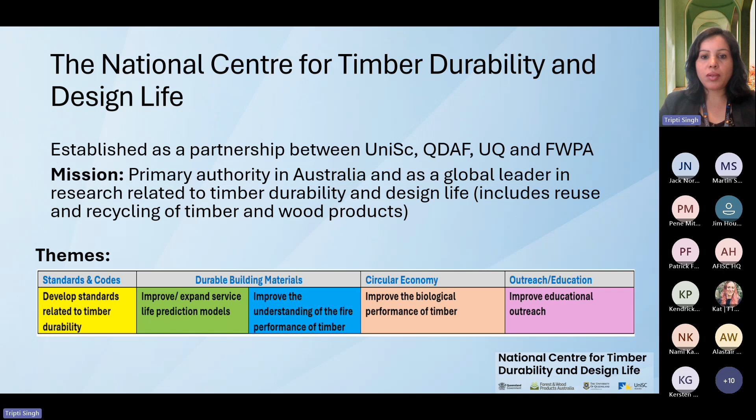Sorry, for some reason it's not going. Next. Right.

Under the circular economy project, we are encouraging the design of buildings and products for long life, maintenance, and reuse via circular economy, promoting the use of recycled timber and wood products. In a linear economy, what we're used to is take, use, and dispose. In a circular economy, which is in contrast, the aim is to eliminate waste and keep resources in use as long as possible. At the end of life, the product makes the beginning of a new cycle. So in the circular economy, we try to make, use, reuse, remake, and recycle.

The Australian government has set several targets and initiatives to move towards a more circular economy by 2030. A report commissioned by PwC for the government has recognized that a circular economy model for Australia could generate over 1.8 billion in direct economic cost savings over 20 years. And it's not only the economic benefit, it has huge environmental benefit too, because the circular economy model could save 165 million tons of CO2 per year by 2040.

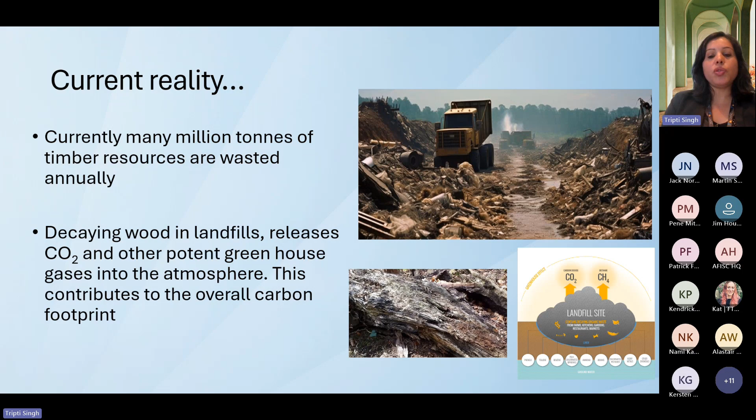However, the current reality is that many million tons of timber resources are being wasted annually in landfills. The issue is not only economic loss, but also environmental loss, because decaying wood in landfill releases carbon dioxide and other potent greenhouse gases into the atmosphere. This contributes to our overall carbon footprint.

The irony is that timber is an ultimate renewable resource, so we need to cascade it through multiple life cycles. One can argue that a piece of wood can have up to seven lives, but currently about 60% of timber resources go to landfill. The rest is predominantly burned for energy.

This is the right time, and there are various constraints and drivers for timber circularity. Looking briefly at the constraints, Australia is a vast country, so our resources are widely dispersed. It's perceived as...

Someone is saying the slide is not moving. No, it was moving for us. I think, Alistair, you might have to click live down the bottom to make sure you sync with the presenter, but I can see it and a few others have said so, you can keep going, Tripti.

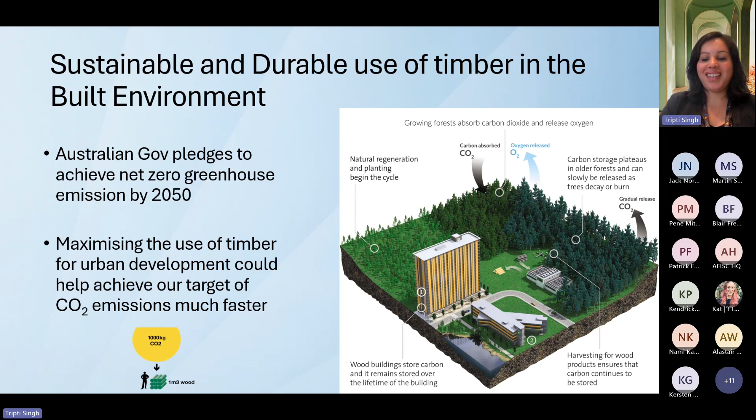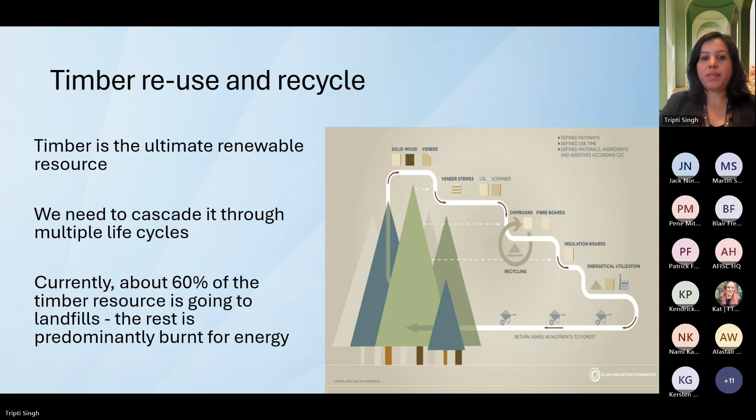Okay, that's great. Thanks, Kersten. So we were looking at the constraints and the drivers. Australia is a vast country, our resources are diverse and dispersed, timber is perceived as a low value material, often our timber has chemicals, resin, and fasteners so it's difficult to separate, and across Australia we have inconsistent regulations.

But there are big drivers. Some people are already using engineered wood products where they are recycling timber, so roundwood has been re-sawn and reused for different applications. Due to limited landfill capacity, we are seeing increasing landfill costs and increasing waste disposal levies. There are many product stewardship initiatives underway in Australia. The National Waste Policy and associated product stewardship initiatives are designed to push the country toward the circular economy mandate. So there are many drivers, and this is the right time for timber circularity.

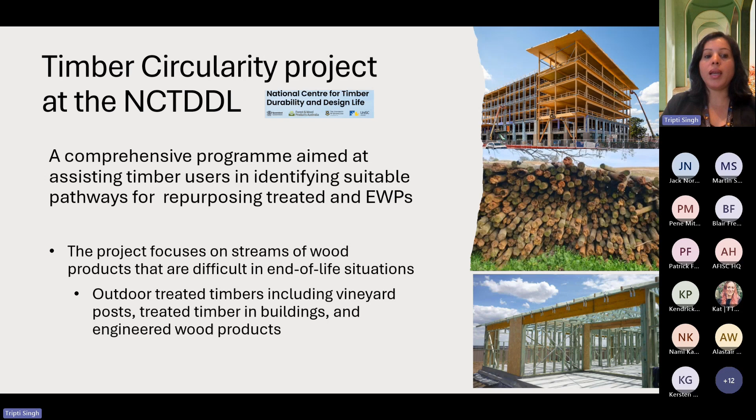That's why at the National Center for Timber Durability and Design Life, we have a comprehensive program aimed at assisting timber users in identifying suitable pathways for repurposing treated and engineered wood products. The project focuses on a stream of wood products that are difficult at the end-of-life situation, such as outdoor treated timber, including vineyard posts, treated timber in buildings, and engineered wood products.

We have collaborators and we acknowledge their support, including financial support, across the supply chain - industry associations such as Forest and Wood Products Australia, AFPA, some treatment and glue companies, manufacturers like FTMA, very supportive FWPA, and users like Wine Australia, who we're working very closely with.

The project has 7 tasks. It's a 3-year program, and we only have about 1.5 years left. What we're trying to do is assess the amount of the waste stream, where it's located, the condition of the resources, and what chemical or resin it contains.

The third task is looking at the regulatory hurdle, which is a major issue with resource circularity. We are investigating options and exemptions that may be required for reuse and recycling of treated timber.

Logistics is significant for all material in the circular economy, particularly in Australia due to the vast distances. So modeling logistics and understanding the costs involved will help determine appropriate solutions in various regions. We're looking at geospatial mapping of all the resources, along with councils with circular economy activities already underway.

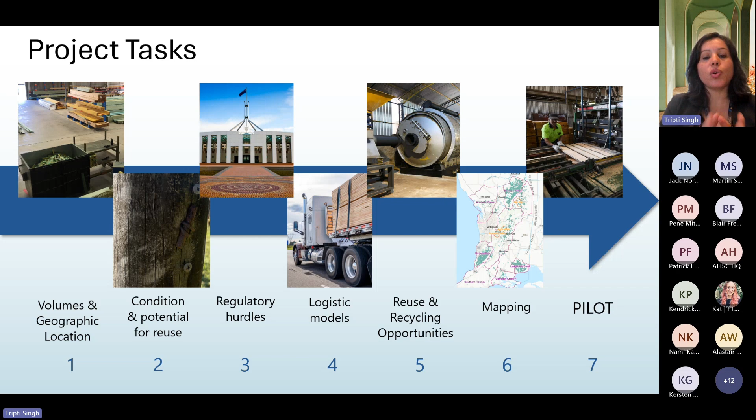At the end of the project, we want to demonstrate some pilots. For example, we're working very closely with Wine Australia on sorting, collecting, and repurposing vineyard posts. So I think that's all I have to say - happy to answer any questions at the end.

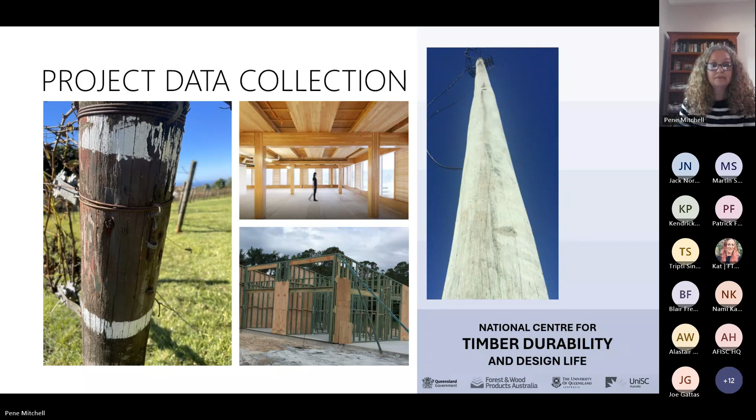But in order to find solutions, we first need to understand the resources that are currently being wasted - so how much resource there is, volumes and weights, where that resource is located, what type of resource it is, and its condition and potential for reuse.

For example, with the vineyard posts, we analysed the amount of preservative treatment retained after 20 plus years of service life. We're also doing strength testing so we can compare the treatment levels and strength to new posts, to determine whether they can be reused in situations where new posts would perhaps be used, such as fence posts in agricultural areas.

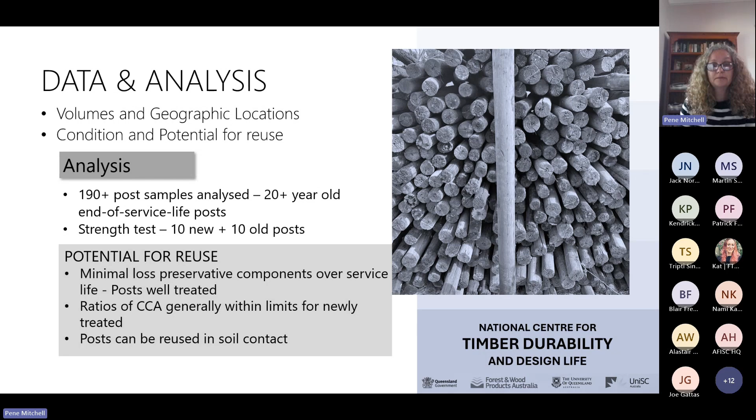Generally in data collection, we've been having discussions with industry and industry associations, undertaking site visits and conducting surveys. We've visited quite a few locations in New South Wales, Queensland, South Australia, Victoria and Western Australia, and Tripti's going to Tasmania soon as well, so we're getting a fair idea of what's actually happening nationally.

In terms of the frame and truss industry, we initially started discussions with Kirsten and Kat at FTMA, who we've had ongoing communications with, and they've been giving us a lot of support for this project. We've engaged with industry and undertaken site visits to understand where the resource that's currently wasted was produced in the fabrication process, how much unused resource is actually being produced, and in what form and condition it's in.

Whether it's clean offcuts or wood shavings and sawdust, for example. In the case of offcuts, what sort of sizes are they that can't actually be used any longer in the process or for other uses on site? We're looking at how the resource is currently collected, so what sort of skip bins are used, for example, where the resource is currently ending up, and also costs involved with this.

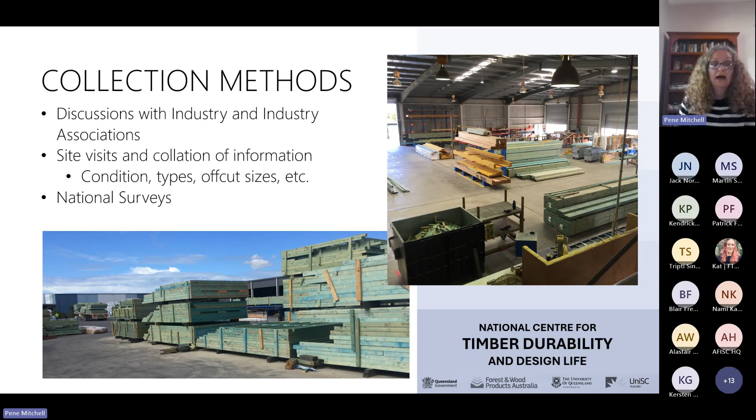So this information that we collated on site gave us a fair idea of how to compose a survey which would allow us to collate the information that we wanted. So we just set up a Microsoft Forms survey that we kept online from February to May this year. We targeted frame and truss manufacturers really through FTMA correspondence. So they put articles in their newsletters and online. They emailed people about it. They also mentioned the survey at their national conference held in March this year. So they were getting the information out widely for us.

So some of the results: we actually got 39 companies who responded to the survey. That was about 16% of the total number of companies. Some of those companies indicated that they did have multiple sites because, as Kirsten mentioned, there's 287 unique facilities, whereas only 249 companies in total. The majority of respondents were in Victoria, New South Wales and Queensland, and 40% were from medium facilities, although in the small, large and extra large facilities there was a similar response rate. The percentage of treated timber reflected the differences between the states. So most of the timber in New South Wales and Queensland was treated, whereas a much smaller proportion in Victoria and South Australia.

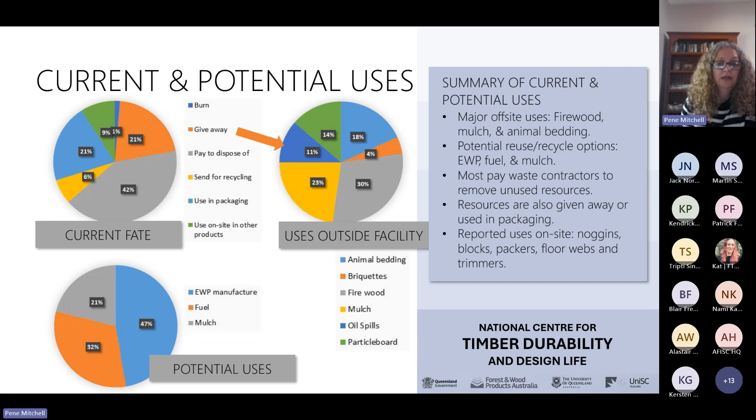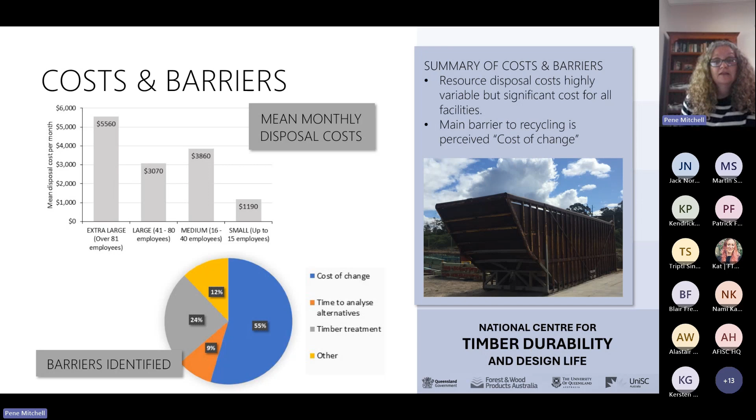In terms of costs and barriers, the mean monthly disposal costs for each frame and truss facility weren't really significantly different between the different size facilities, but there is a significant cost associated with unused resource disposal, which really could be addressed by recycling or reuse. However, most of the respondents mentioned that a barrier to transitioning to a circular economy was the cost of change. So that was interesting.

So some of the recommendations that we're looking at to help industry move forward to develop strategies for a circular economy include increased data collection from industry. What we've done is really only an initial snapshot, and we will require future data to enable a greater understanding and also understand the incremental improvements within the industry if we continually collect data. So there may be opportunities to include questions within the frame and truss sector overview, which collects data regularly through verbal surveys, and other opportunities may arise so that we can continue with the data collection.

The second recommendation is further engaging industry stakeholders by feeding this type of information back. So the more that we talk about what we're finding, hopefully that will increase the participation for data collection in the future, and showing case studies as well will hopefully help industry understand the possibilities and increase awareness in general.

Lastly, we need to really understand the intersection between existing practices and logistics. So what's actually happening? How is waste being collected at the moment? And how is it being moved? So that any adoptions that we make to try and recycle should really work within the confines to reduce those implementation costs that are being thought of as a barrier.

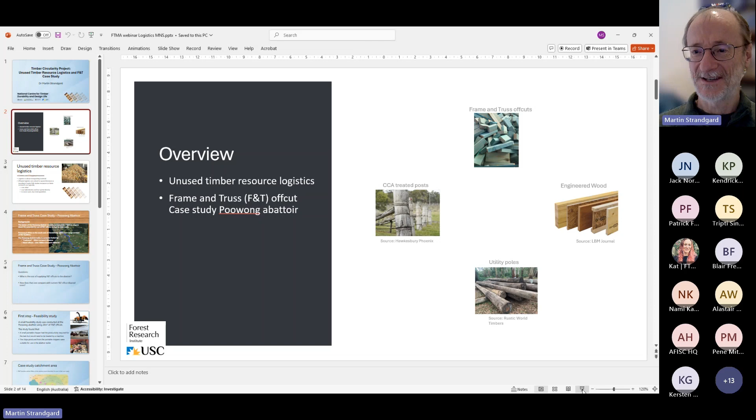Let's see. Okay, so I'm going to talk about two topics. Briefly talk about unused timber resource logistics. Most of what I'm going to talk about is a case study that we're running about potential for using frame and truss offcuts in the boiler at the Poowong Abattoir.

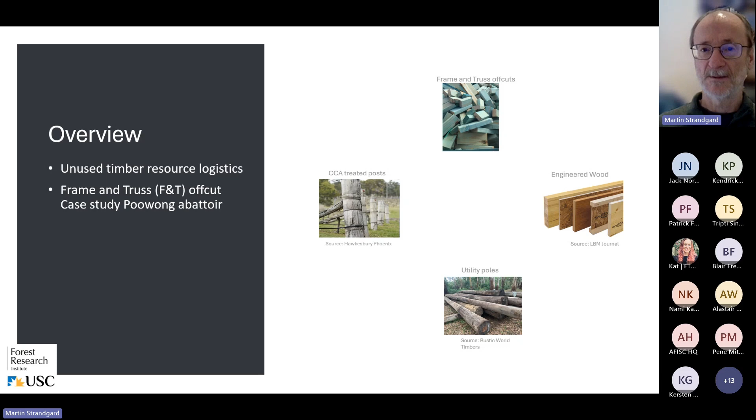So logistics, simplistically put, is about transporting material. The unused timber resource has some characteristics that make it more difficult to transport cost effectively, shall we say. So efficient logistics are critical if we're going to successfully reuse or recycle these resources. The characteristics include low value, low bulk density, and low spatial density.

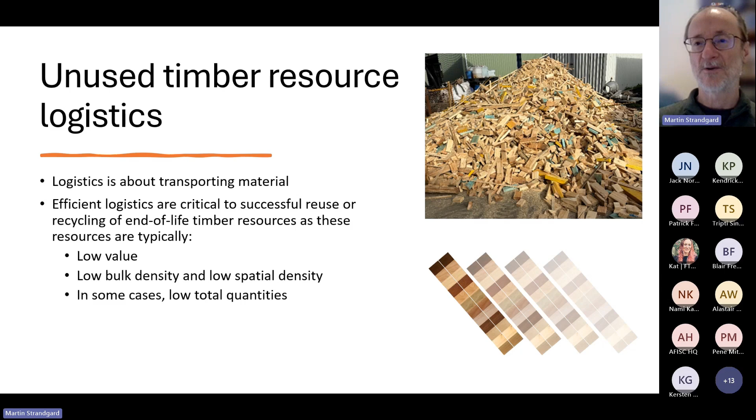What I mean by low spatial density is that there are small quantities, for example, at each frame and truss facility, but then each frame and truss facility is spread apart from the others. So the resource that's there is dispersed over a broad area. In some cases, including this case study, there are low total quantities as well. So on to the case study.

The owner of the Poowong Abattoir recently contacted the FTMA to inquire about the potential for using frame and truss offcuts as fuel for their boiler. Poowong is 85 kilometres to the southeast of Dandenong, where there's a large number of frame and truss facilities. They currently fuel it with a fuel called cordwood, which is transported from about 90 kilometres away, as well as wood offcuts that are being transported over 200 kilometres.

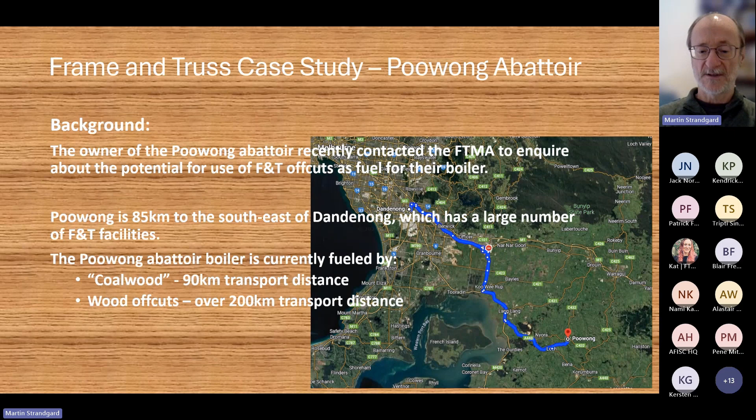So the questions to be addressed for this case study were, what's the cost of supplying the frame and truss offcuts to the abattoir? And how does that cost compare with the current disposal costs by the frame and truss facilities? First part of the study was a small feasibility study. And this was conducted at the Poowong Abattoir, where 25 cubic metres of frame and truss offcuts were delivered and chipped up using two different chippers.

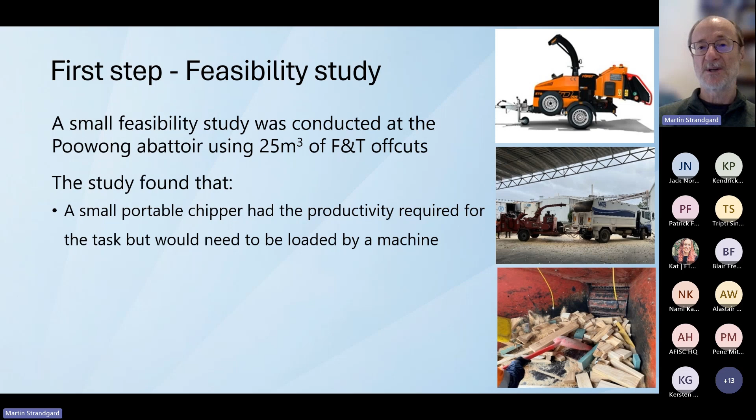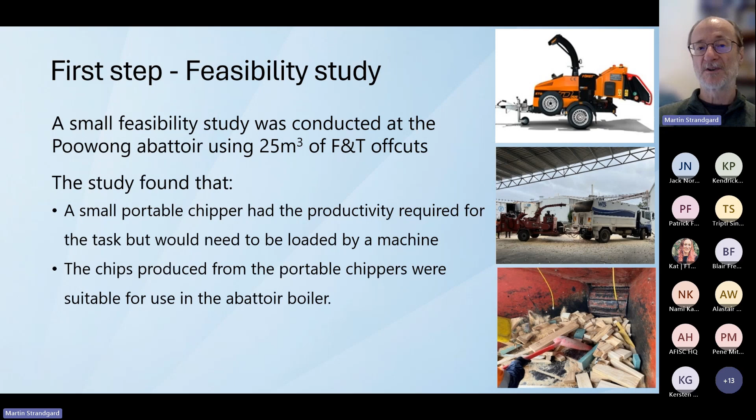So what we found was that a small portable chipper was suitable for the task, but in order to maintain the productivity required, it'd have to be loaded by a machine. And also the chips produced were suitable for use in the abattoir boiler.

As I said earlier, they get their coalwood from about 90 kilometres away, which is that little pinkish dot up in the top left corner. And so that was used as a rough idea of a catchment area for frame and truss facilities that could be used as suppliers of offcuts in the case study. You can see down there a large quantity of frame and truss facilities in and around Dandenong.

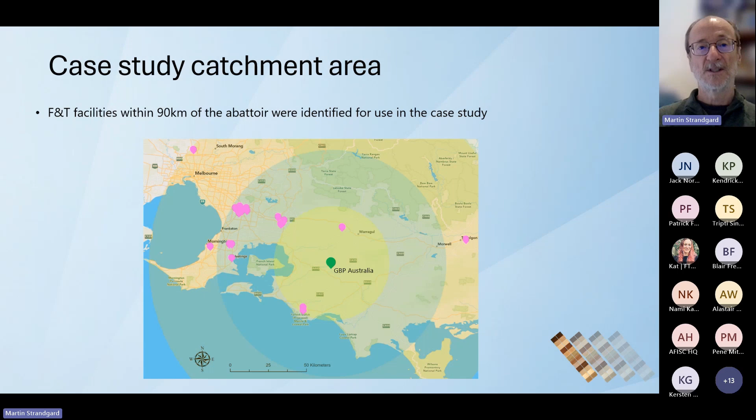So the current process for disposal of offcuts by the frame and truss facilities is based around skip bins. So we decided for the case study to mimic that approach to minimise any potential changes at frame and truss facilities. I only considered the medium and large facilities in that catchment area, as the small facilities produce too few offcuts. Total offcuts produced by those medium and large facilities were estimated to be 273 tonnes per month.

2 skip bin sizes were used in the case study. 31 cubic metre skip bins are the largest that are commonly available, the green one on your left there. And we also found that there's a facility in Queensland using 70 cubic metre skip bins.

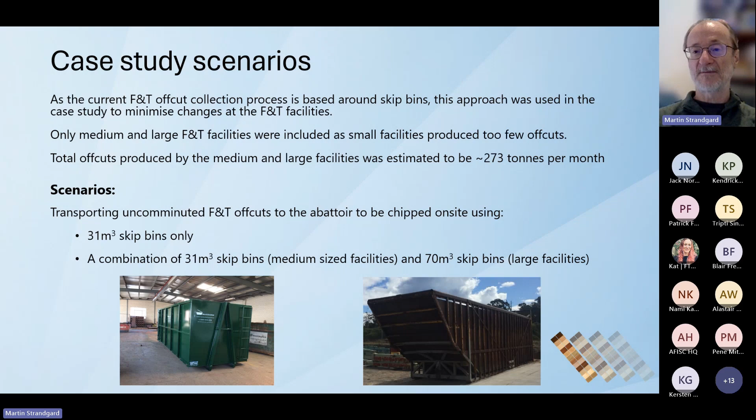The reason that 70 cubic metre skip bins were confined to the large facilities is the small boilers, such as at the abattoir, are quite sensitive to the moisture content of the fuel. So it was felt that only the large facilities would fill a large skip bin quickly enough to avoid it being left out and potentially getting wet.

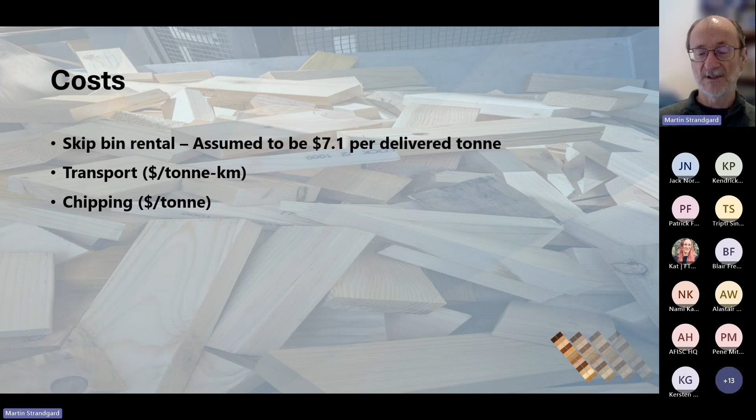So 3 costs were identified: skip bin rental, transport and chipping. Skip bin rental, based on the survey that Pene described and interviews with individual facility managers, was assumed to be $7.10 per delivered tonne. Transport costs, there's a picture of a hook lift bin if you're not sure what I'm talking about there, being loaded onto a truck. As I said, facilities within 90 kilometres were identified.

The transport rates, how I've calculated these are going to be described in more detail in a report that will be publicly available. I came up with between 25 cents and 50 cents per tonne kilometre for the smaller bins, and 15 and 25 cents per tonne kilometre for the larger bins.

I also adjusted them because if you're paying someone by the tonne, but when the skip bin is full it's only using slightly over half its weight capacity, they might go and get a job somewhere else. So I adjusted the transport cost to take into account that low density of the offcuts. And the estimated transport costs are in the table. You'll see that there wasn't a lot of drop in use of the 70 cubic metre skip bins, and this reflected the fact that there weren't a lot of large facilities in that catchment area.

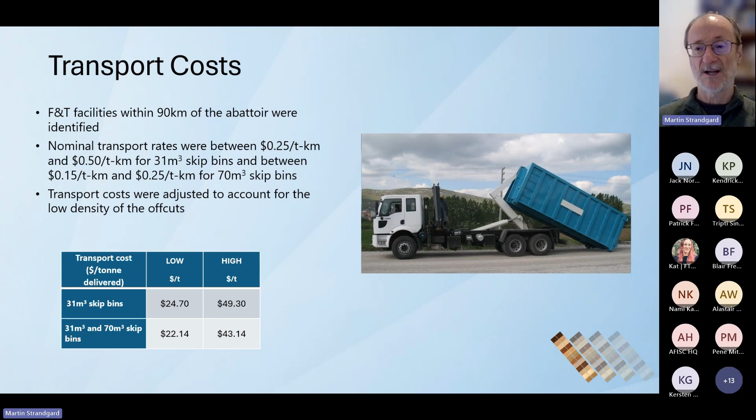Chipping costs: based on the feasibility study, I've selected the Morbark 1425 chipper as a similar size engine to the larger chipper used in that feasibility study. But its big benefit is that it comes with a feed-in deck. So a small machine will be able to load the offcuts into there when they come in to be processed.

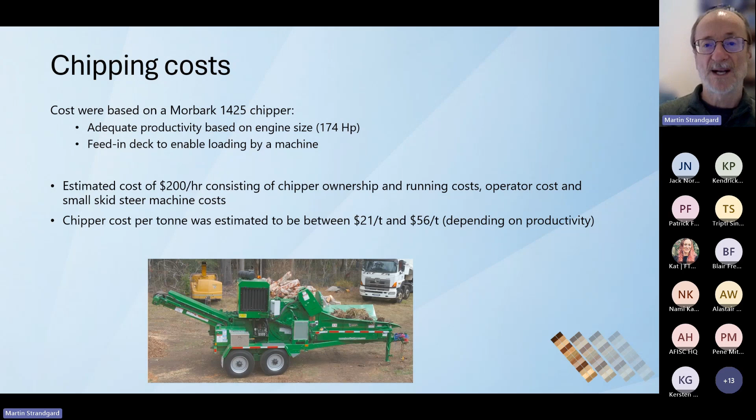Estimated cost for the chipper was $200 an hour, consisting of the ownership and running costs, the cost of an operator for the skid steer, and a skid steer itself. So the chipper cost per tonne was estimated to be between $21 and $56 a tonne, and that depends on the productivity of the chipper. It's a relatively new type of chipper, so there haven't been a lot of productivity studies to base the chipper cost per tonne on.

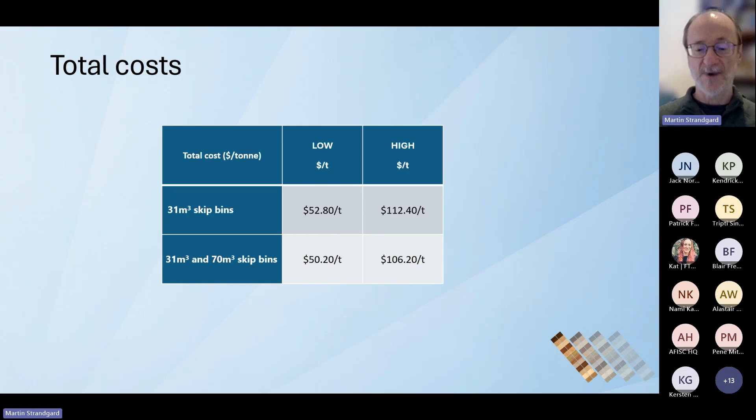So the total costs, adding up the cost of the skip bin rental, the transport and the chipping, basically came out between about $50 and $110 per tonne, a pretty substantial range, I do admit. So comparison with current disposal costs: from the survey that Pene described, we came up with mean disposal costs of $20 to $50 per tonne. But the caveat there is respondents were selecting values from broad ranges. So I take those values with a bit of a grain of salt.

Other potential places that they could be taking the offcuts to include landfill, which in rural Victoria, from studies that we've done, has a mean cost of $265 per tonne. In an interview I did with a waste timber disposal facility manager in Dandenong, I was quoted a price of $100 per tonne for frame and truss offcuts, excluding engineered wood products.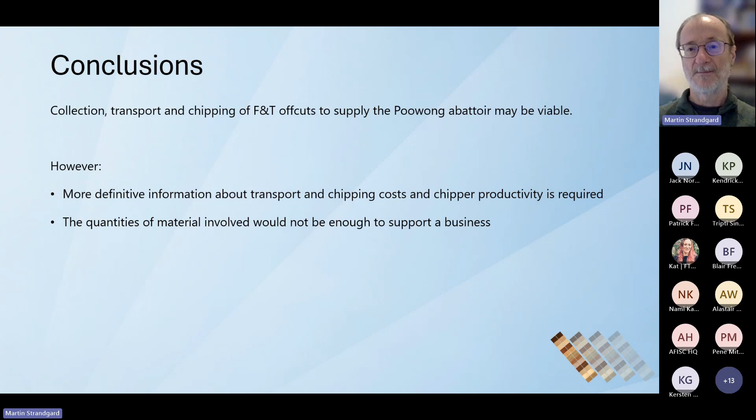I have got the first question in. Tripti, it's for you. It's saying that you mentioned that around 60% of timber resources in Australia are directed to landfill at end of life. How does this proportion compare with other OECD countries or notable international comparisons? Okay. Could you put your camera on, please? Okay, here we go.

In Europe, the majority of the countries have a zero waste policy. So, for example, if we're talking about Denmark or another European country, there is no comparison. We are way too high. But the issue is different as well. There is very little CCA treated timber there. We have around 30% of treated timber as CCA treated timber. If we compare with the US, it's somewhat similar. Currently, they are trying to recycle and reuse as well, but they are sitting around 50% as well. So yeah, that's where we're at.